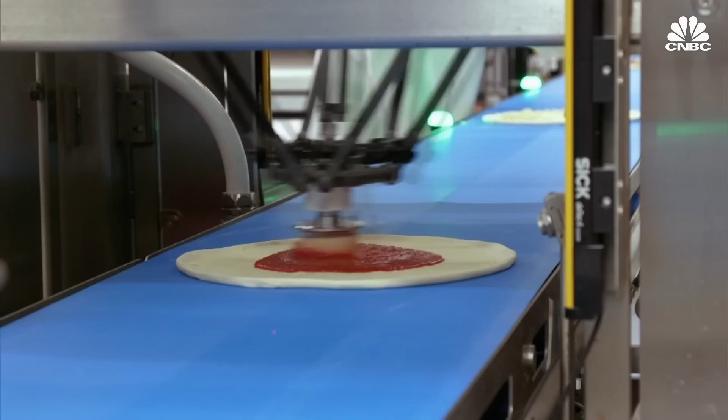What if there was a better way to make and deliver pizza to you? Turns out there is. Fast food jobs are demanding and sometimes even dangerous, but not for robots. The machines can look at more things faster in greater detail. They never get bored. They don't need breaks.

Boston Dynamics has made a name for itself by building robots like Spot. We're using technology to advance the state of the art in molded fiber production, and we can do it with speed that is absolutely category leading.

Welcome to White Castle. This is Brittany. How may I help you?

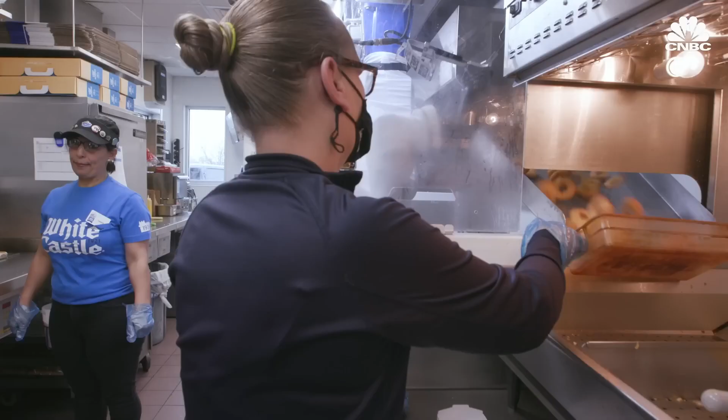This robot named Flippy runs the fry station at a White Castle outside of Chicago. With its mechanical arm and using computer vision technology, Flippy can cook everything from French fries and onion rings to cheese sticks. White Castle said it plans to add 100 Flippies to its kitchens nationwide. We used to need 2 people to operate that French fry area during peak hours, and now we are able to only have 1 person operating that area.

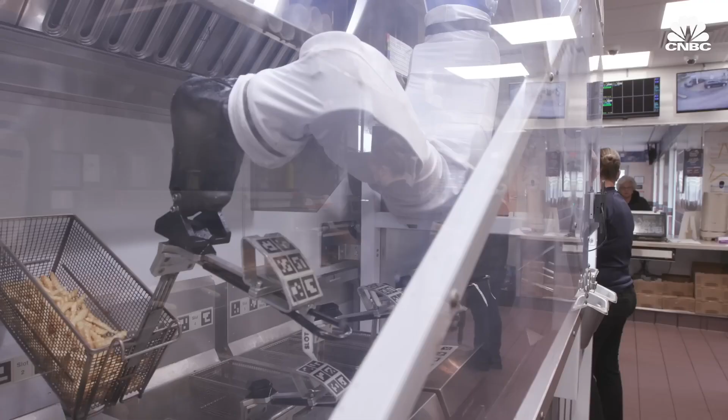Would you like to try the mac and cheese bites today? All right, thank you. If the screen's correct, it is 827.

Second window, please. Fast food jobs are demanding, quick moving, and sometimes even dangerous. But not for robots. When you look at the restaurant industry, it's a little bit late to the party in adopting automation and robotics in particular.

So far, the restaurants that are using them or trying them out say that this automation really only has to do with helping relieve boring tasks from workers' plates, help make their jobs easier, let them engage with the customers more. But there's a lot of reports out there kind of guesstimating how many jobs could be replaced by these robots, by automation. Up to 82% of restaurant positions could to some extent be replaced by robots.

Automation could save U.S. fast food restaurants over $12 billion in annual wages. And restaurants are also struggling to find workers. American restaurants are down more than 560,000 jobs, or about 4.6% of its workforce from their pre-pandemic levels. About a third of Americans worked in a restaurant as their first job, and half have some restaurant work experience.

Yeah, the economics of this are very, very compelling. If you take minimum wage, just around the $20,000 per year mark, that's the cost of 1 robot. Other companies in the space include Picnic, that has a robot that makes pizza, and Autec, whose machines make sushi.

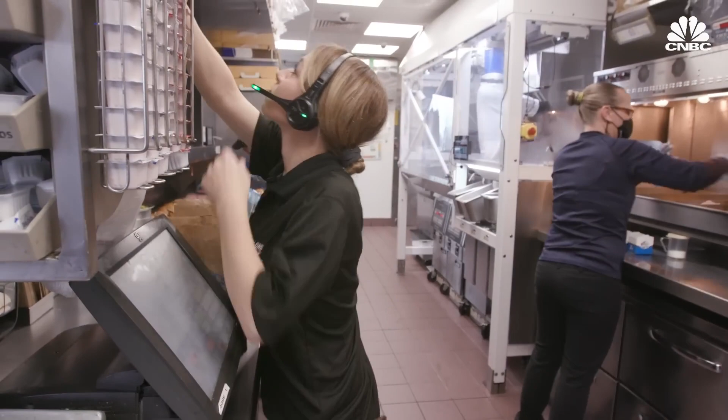So what impact will robots have on the fast food industry and the livelihood of its workers? CNBC got a behind-the-scenes look at restaurant robot maker Miso Robotics to find out.

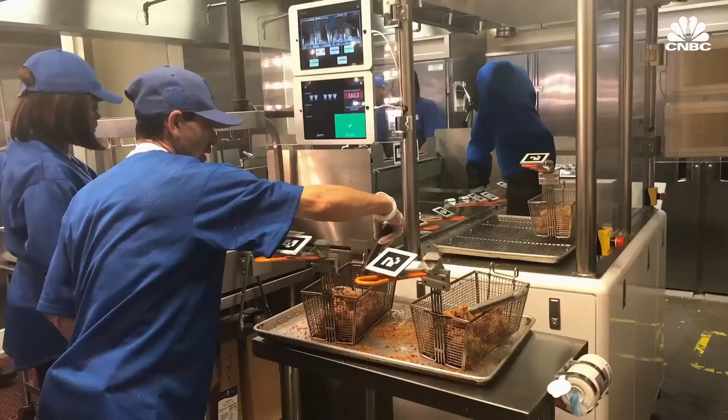Miso Robotics got its start in 2016 with a handful of engineers in a Pasadena, California garage. 2 years later, the company launched Flippy at a nearby Caliburger restaurant. Flippy's first job was turning over a hamburger patty after it was placed on a grill by a human chef. But the company quickly pivoted to fried foods, rolling out a portable fryer station for baseball games at Dodger Stadium.

This was really the peak throughput test for us. Can Flippy keep up with in-between innings at a Dodger game and everybody goes to the concession stand? Can we meet that demand?

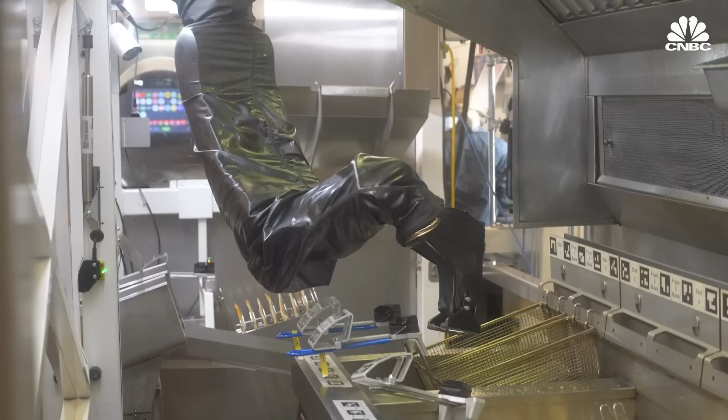In 2021, Miso launched Flippy 2 using a mounted rail system, AI, and computer vision technology that can identify and track food as it moves through the structure. Although it has a camera, tablet, and robotic arm, engineers say the real tech is in the software.

The hard thing to get right about this product is having the computer vision, the algorithms that plan the cook cycle, and the software that manages the robotic motion to all work together so that it's as reliable as a refrigerator and it does the job.

Food is dispensed directly from the freezer into a basket. The robot's computer vision identifies the type of food and places it in the appropriate fryer. Once the food is cooked, the basket is taken out of the fryer, shaken, and dumped into a holding area where it is bagged by a worker.

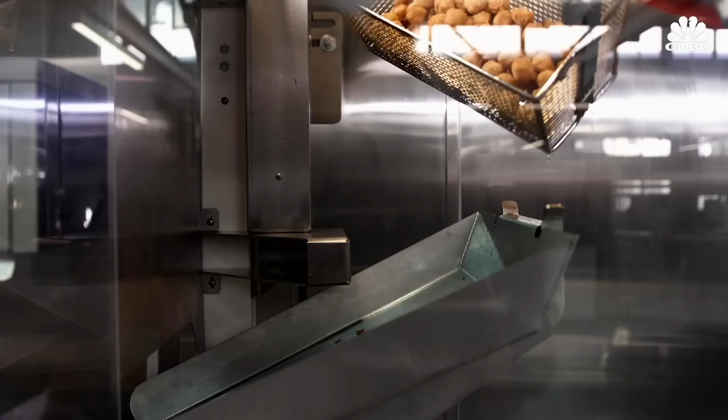For those of us who have been in a restaurant, this is exactly the same process that is done today by a human. He's constantly playing like a multi-frame game of chess in his mind, understanding where to be next, so his sequence of movements is precise and he doesn't undercook or overcook food.

But what about the cost?

Miso charges restaurants about $3,500 a month for a Flippy 2 under its robot-as-a-service model. The company charges an additional fee of about $10,000 for installation.

By comparison, the median hourly wage of fast food workers in the U.S. is just $12.07 an hour. There were roughly 11.7 million restaurant workers in the U.S. in 2022. But Flippy 2 is different.

Flippy 2 works around the clock. We have many 24-hour locations where Flippy 2 is installed. Flippy doesn't call in sick.

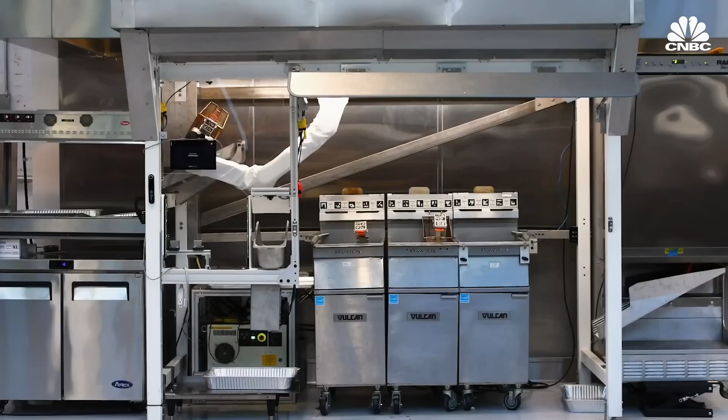Built in Columbus, Ohio, it takes Miso about 6 weeks to manufacture one Flippy 2. The current off-the-rack mechanical arm is the same type designed for car factories, and Miso says they cost $15,000 each, plus another $5,000 to modify with additional grippers and sensors. Last year, Miso partnered with robotic arm maker Ally Robotics and hopes to start producing its own arm in 2023.

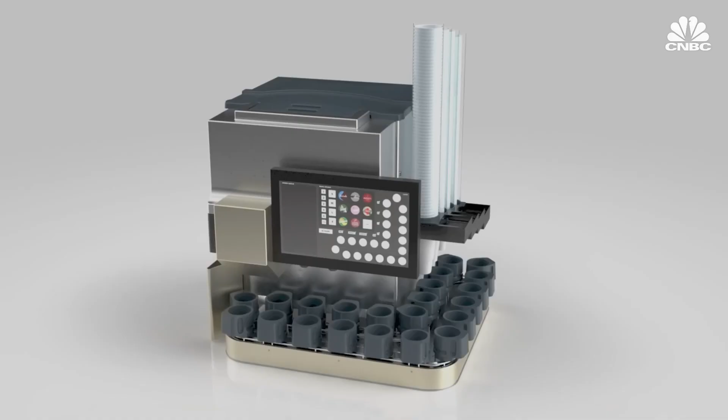The company also makes a streamlined version of Flippy 2 called Flippy Lite, as well as a drinks dispenser named Sippy. Flippy Lite is currently being tested in restaurants by Chipotle. And what Flippy Lite is designed to do is to take one item that requires frying and just cook the heck out of it all day long.

With about 25,000 shareholders, Miso has so far raised more than $70 million in crowdfunding. The company's also announced it is testing a robot that fries chicken wings for WingZone.

The global fast food industry is a $273 billion business, including more than 280,000 fast food restaurants in the U.S. alone. At this White Castle on the outskirts of Chicago, staff in the busy lunch hour shift face a barrage of orders coming from drive-through customers as well as the main counter.

Would you like to try any mac and cheese bites today? Oh, thank you. If the screen's corrected, it's 10:42. Second window, please. It's very fast-paced. We're all in our positions, but we do move around, jump about to help out to get the orders out.

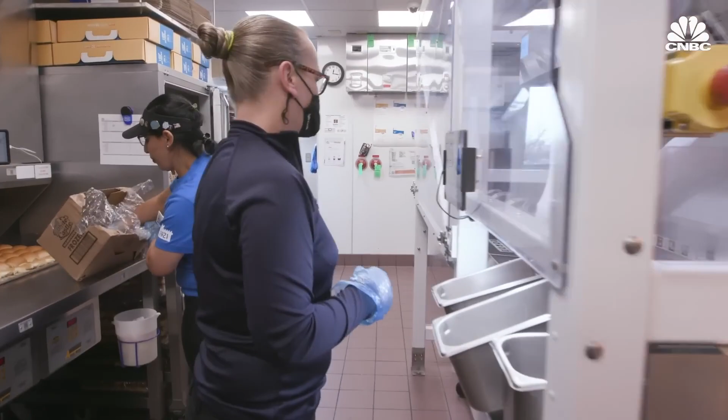But meager salaries, fewer teenagers in the workforce, and fear of COVID have been a drain on fast food restaurants. Job openings at restaurants and hotels reached 1.3 million in November 2022, the 20th consecutive month with over 1 million vacancies. Bars and restaurants make up about 90% of those positions.

A typical fast food worker makes about $26,000 a year, compared with a concierge at a hotel who can earn more than $37,000. During the pandemic, we faced a lot of staffing challenges, and things are better, but there are still challenges with staff in many locations.

To assist workers, White Castle added Flippy to take over its fry station. The robot cooks food more consistently and doesn't require time off.

And I think some restaurants are also looking at this as a way of, well, this robot is expensive, but is it cheaper than however many employees I would need to hire, especially because a lot of workers have not been sticking around as long as they're used to.

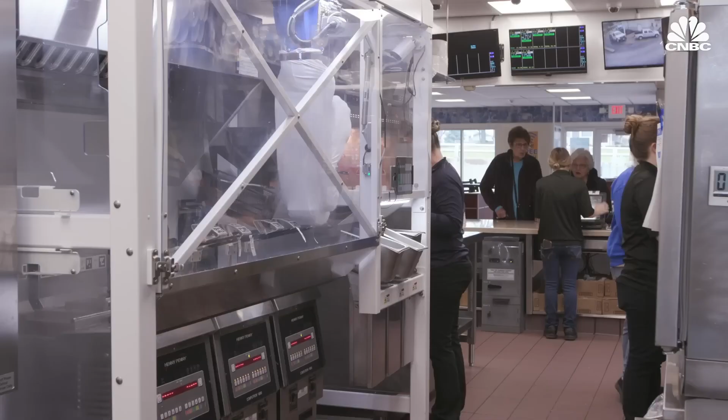This is one of the positions that is the hardest to fill and hardest to retain for restaurant operators. There are dozens of positions back of house. This one is a really demanding one. It's hot and it's very, very fast paced.

Robots like Flippy solve other problems for restaurants too. For starters, fast food work can be dangerous. In California, the state with the highest number of people employed in the fast food industry, workers face health hazards, ranging from overflowing sewage, smoke inhalation, and extreme heat, according to one study.

Turnover is another headache for the industry. Prior to the pandemic, the restaurant industry faced a workforce turnover of 130%, according to Panera Bread's CFO, Michael Bufano. At the same time, low-wage workers made up 43% of the U.S. workforce.

As you look at the labor allocation within the restaurant, that's being able to shift one human from that station somewhere else, and that's saving every single month probably somewhere around $700 to $900 in actual profit.

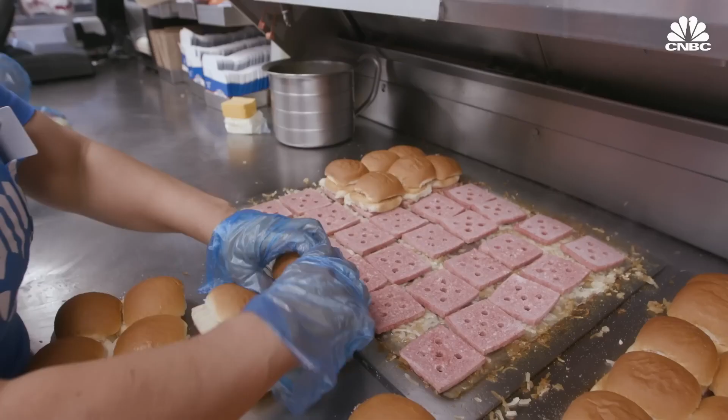Another incentive for restaurants, hard-to-fill positions have forced chains to push hourly wages to new highs. The wages have been very low in these industries. They've really been very much pegged to the minimum wage, so that when the minimum wage has been allowed to decline in real terms, that is, it hasn't kept up with inflation, then those jobs get progressively less and less attractive.

Labor is one of the biggest costs restaurants face, averaging about 25 to 30% of sales. McDonald's said it would reach an average of $15 an hour by 2024 at all company-owned restaurants. Starbucks said it was bringing its pay floor for U.S. baristas to $15 an hour.

Gen Z consumers made 5 billion restaurant visits in the year ending July 2022, including 4.3 billion trips to fast food eateries.

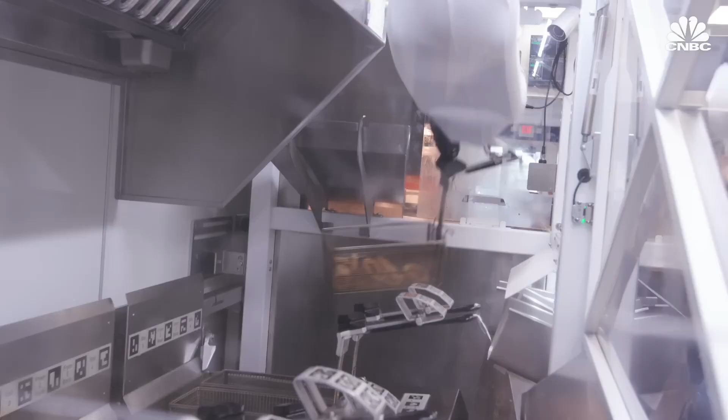Restaurants often have thin margins, which is one of the reasons why adoption of automation has been slow. But that could be changing as the cost of robots has declined by 50% over the last three decades.

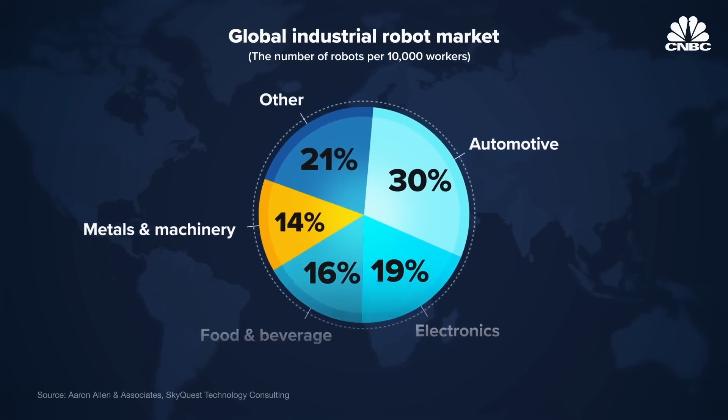Industrial robot usage has tripled over the past decade, from about 1 million in 2010 to 3 million in 2020. The auto industry, by far the largest segment in the market, is followed by electronics, food and beverage, metals, and machinery. The industrial robotics market is expected to reach $81 billion by 2028, up from almost $42 billion in 2021.

But will those trends impact Miso's business? Robots are hard and expensive to develop. It takes a lot of time and money, and frankly a lot of engineers, to get all the technology working together smoothly. Miso makes money by having more and more robots in the field.

In 2021, Miso spent $1.5 million on R&D, $7.8 million on salaries, $6 million on sales and marketing, and a little over $6 million on overhead and administrative expenses. Revenue was just $36,000 in 2021, mostly from the deployment of one Flippy.

Right now, it seems like Miso Robotics is probably the biggest and best known player in the space. Competitors are a pretty small pool at the moment. We've been on the forefront of this for a long time, but they are coming, and we know the ones that aren't here today will be here tomorrow.

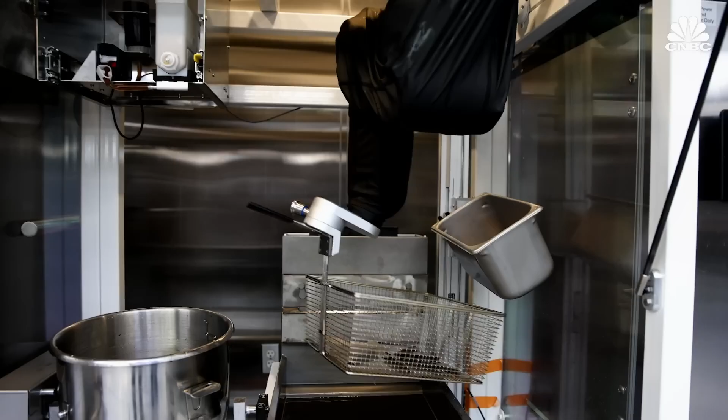Robot adoption could come quickly, in a similar fashion to the way delivery apps revolutionized the restaurant space. The global food delivery app business is over $150 billion, triple the amount it was in 2017.

And that would be welcome news for fast food restaurants who face pressures ranging from rising food costs to staff turnover. Americans spent $2.1 trillion on food in 2021, with more than half of that money going to food away from home purchases. The tide has turned.

There's no longer a question of whether robotics are coming to the industry. It's a foregone conclusion. The question is, at what pace and in what form? And what you will see in the months and years ahead, for the foreseeable future, is more and more automation solutions like Flippy 2 being deployed in everyday restaurants, including some of the best known brands in the world.

There was a lot of hype in 2017 around Zume. What if there was a better way to make and deliver pizza to you? Turns out there is. Zume is revolutionizing the delivery model. All pizzerias out there, you're in trouble.

At the time, Zume was a pizza company that used robots to automate the pizza creation process and utilized large oven-carrying trucks to bake the pies as they traveled to customers. The idea was a hit and earned Zume a $375 million investment from SoftBank.

So why are we talking about pizza made by robots in a video about compostable packaging? That was our question too.

One of the problems we encountered in pizza was that our beautiful pizza, with no stabilizers in it, in a traditional box, declined in quality from the time you cooked it to the time it was delivered, to the point where we didn't think it was good enough. So we designed a new pizza box.

At the beginning of 2020, Zume laid off half of its workforce, 360 employees. This is another stumble for SoftBank's Vision Fund, which invested $375 million into Zume, bestowing that unicorn status, a $1 billion valuation. But the company kept going.

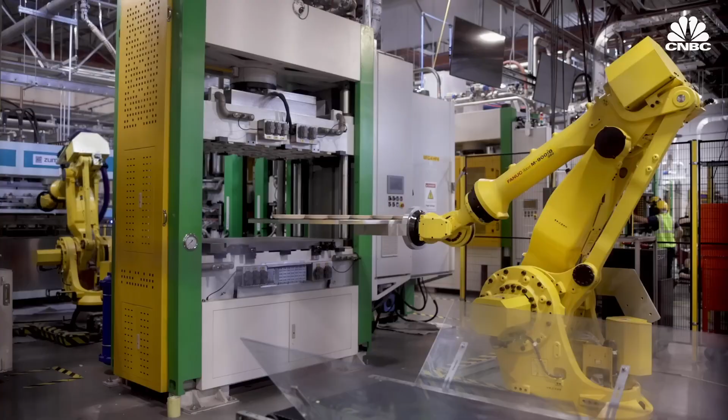Now, Zume is dedicated to producing compostable packaging that is durable and backyard compostable, breaking down in a matter of 90 days. Zume is breaking into the...

$274.2 billion sustainable packaging market, which is expected to grow to $413.8 billion by 2027. But the industry does face challenges. I wish I could say it was just the cost, and cost is going to come down, or that we need one thing, but it's really, I think, a variety of factors. As the oceans fill up with plastic waste and as companies make pledges to switch to greener packaging, it could be great timing for Zume.

So let's take a look at some roadblocks in the compostable packaging industry and what can be done to overcome them.

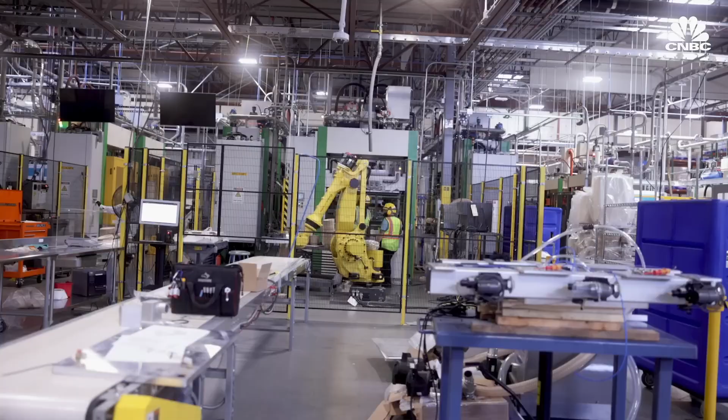Let's talk about the life cycle of a package first, using a takeout container as an example. Takeout containers can be made of many different materials, which all have their pros and cons, like plastic, metal, styrofoam, cardboard, and a compostable material like molded fiber.

Some plastics and metals can be recycled, but they have to be perfectly clean in order to be made into another product. They can also be downcycled, which is where they're used to create something that cannot be recycled again, like a park bench. But recycling has failed in the US.

In 2018, less than 9% of plastic waste was properly recycled in the US, and it got worse in 2019 when China stopped importing American trash. So most of what you think may be getting recycled is actually getting sent to landfills, or making its way into rivers and oceans. The UN says that by 2050, we'll have more plastic than fish in the ocean.

Plastics have become so prevalent that every person on the planet eats a credit card's worth of plastic a week. Plastic recycling has actually been considered by some to be a ploy by oil companies to make plastic production seem more environmentally friendly than it is.

And even sending food scraps to the dump can be harmful. When you're actually introducing those organics in landfill, you create a lot of methane. And as you know, methane is a very important greenhouse gas emission. So then you want to reduce that amount of organics that you send to the landfill.

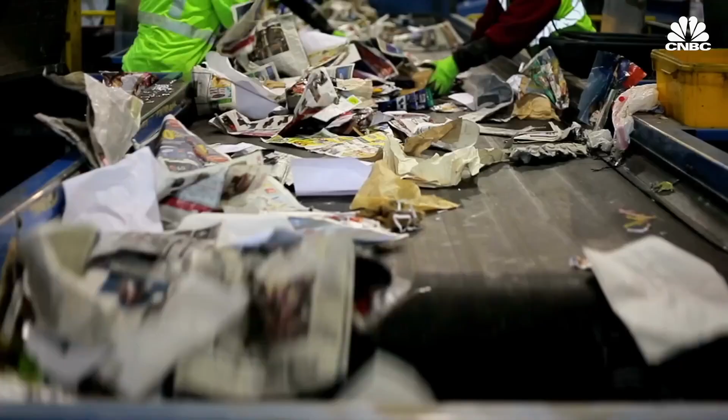Aluminum containers are a bit easier to recycle, but still only saw about a 35% recycle rate in 2018. Cardboard is recyclable and compostable, but only if it's clean and doesn't have some sort of coating on it. Virgin cardboard can also contribute to the deforestation of endangered habitats. Styrofoam, or polystyrene, is technically recyclable, but not in a way that is economically feasible or environmentally effective.

Many cities and states, including New York City, Maine, Vermont, Maryland, and a long list of cities in California, have completely banned the use of polystyrene, and the trend is growing.

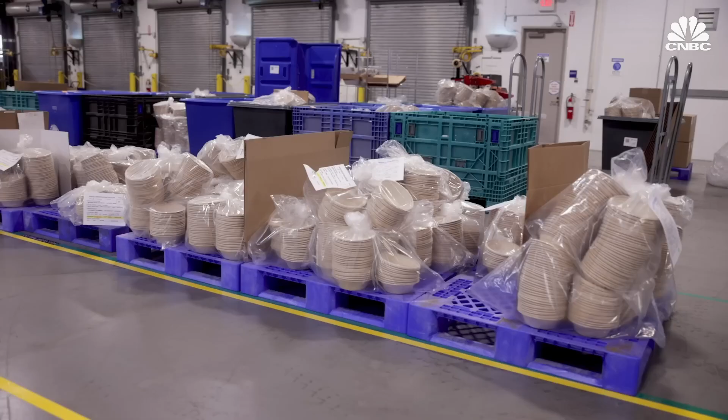Compostable materials seem like a solution to these recycling issues, but come with their own set of confusing marketing tactics and end-of-life difficulties. For instance, the word biodegradable, which is used to describe certain materials like plastic made from corn, has been scrutinized. A bio acronym at the beginning doesn't necessarily mean that the polymer is from bio-based resources or is biodegradable.

And if it's biodegradable, it doesn't mean that it's compostable either. The word biodegradable on its own, as a marketing term, is seen as potentially pretty misleading. So several states have passed laws actually forbidding the term biodegradable in marketing language when it comes to single-use items, states like California, Maryland, and Washington, and Minnesota for bags specifically.

Some materials require composting in an industrial facility, like certain cutlery and coffee cup lids, which means you can't just throw it in your backyard and hope it will break down. It has to be sent to a facility that monitors the chemical and temperature levels of a large compost pile. The materials are also sifted to make sure everything has broken down properly.

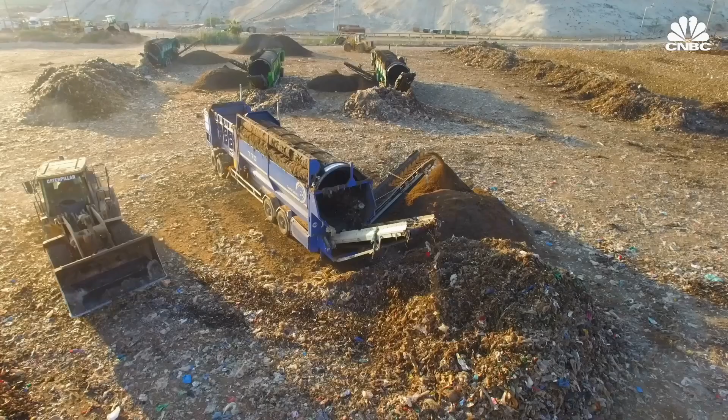And if you think you're doing the environment a favor buying these industrial facility compostable products and still throwing them away in the trash, you're only partly correct. Landfills are usually too compressed to allow oxygen and microorganisms to break materials down, even for things like food or paper, which are usually pretty easy to break down.

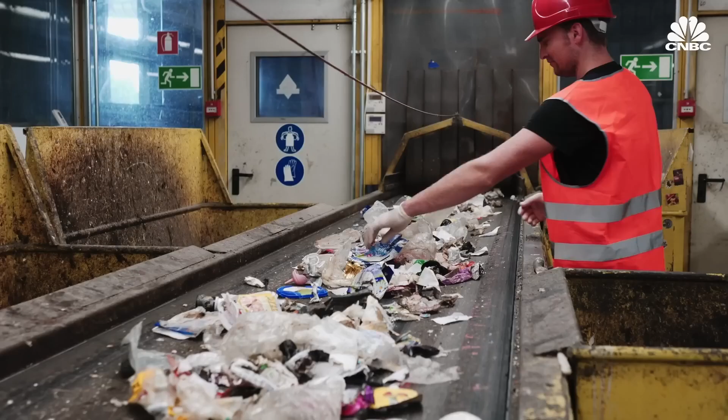Unlike with recycling, where you have different plastic types, different shapes, which can help determine recyclability, and each community has its different requirements based on what their recycling facility can sort, there's no one common definition of what is recyclable. With compostability, it's different. We have international standards saying this is what is compostable, regardless of what plastic type you're using, regardless of whether there's paper in there or not.

According to one report, only about 27% of the United States population has access to some kind of composting program that accepts either food waste only or food waste and some form of compostable packaging. So it's not a ubiquitous solution yet.

Backyard compostable packaging can break down without the use of industrial monitoring. They use the microorganisms in the soil or water to break down packaging. For people living in areas without composting services, this gives consumers the option to discard their waste in a local compost pile or even in their own backyard. We've tested our products with independent labs in all of the known waste streams, and we have all the certifications that give you the results you'd be looking for.

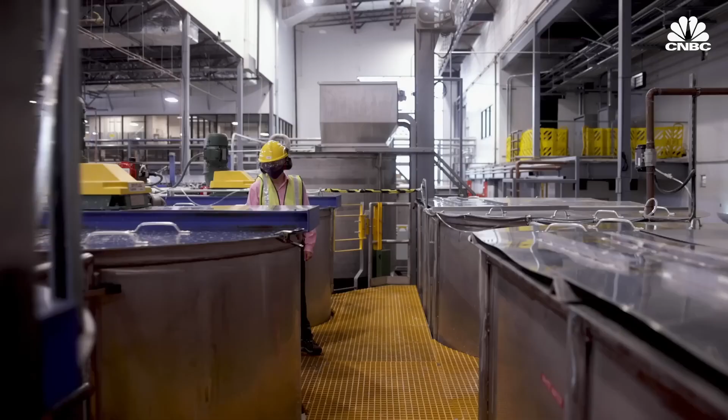Let's build a pulp mill next to the source of the agricultural waste, so it doesn't get burned or taken to a landfill. Turn it into premium molded fiber packaging that is then composted, so it's a place to grow the next crop. It's a closed loop supply chain, and that's something we've heard a lot about over the past year.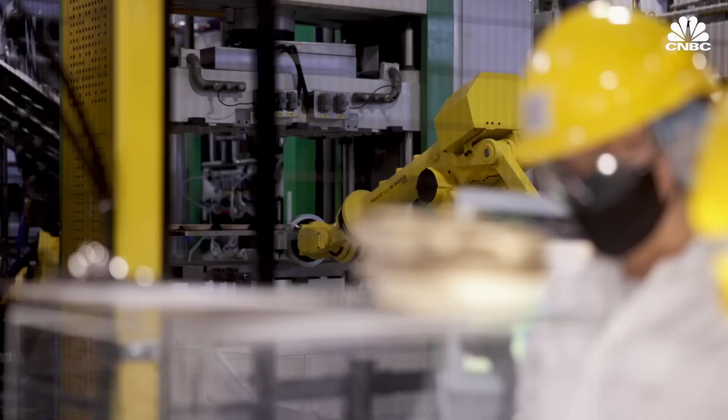The company has products available in 21 countries, including takeout containers, cosmetics packaging, and their robotic technology for when a company wants to produce packaging themselves.

We work with some of the largest industrial companies in the world, and they build factories based on our technology. At the same time, we work with some of the biggest brands in the world, and we solve their product problems. We help give them a road beyond plastic. When we have these fully qualified products and these fully qualified factories, we connect the two together, giving brands a path beyond plastic at scale, with great economics for the brands and for the factory partners.

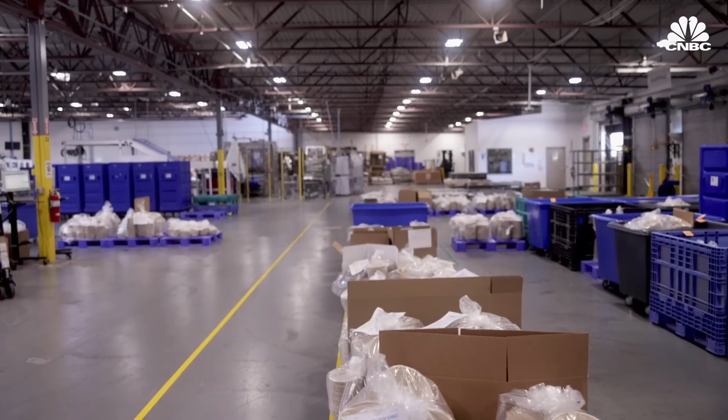The sustainable packaging industry is a $274.2 billion a year business. Of course, the packaging industry as a whole is about $900 billion, so there's still a lot of work to be done.

There are some constraints when it comes to compostable packaging, like higher cost. 100 plastic straws can cost as low as $1.53 when bought in bulk, compared to paper straws, which can cost $1.67 for 100, an increase of 9%. These plastic clamshell containers for burgers and sandwiches can cost 13 cents each when purchased in bulk, while their natural fiber counterpart can cost 19 cents each, an increase of 46%.

Remember, packaging is a commodity and it's always a low-cost product. So in general, for food or this kind of situation, your margin is very small, meaning you don't have a large amount of room for cost in the packaging system. Zume says its robots are the reason it can keep costs down. Previously, machines could either make very low quality things quickly.

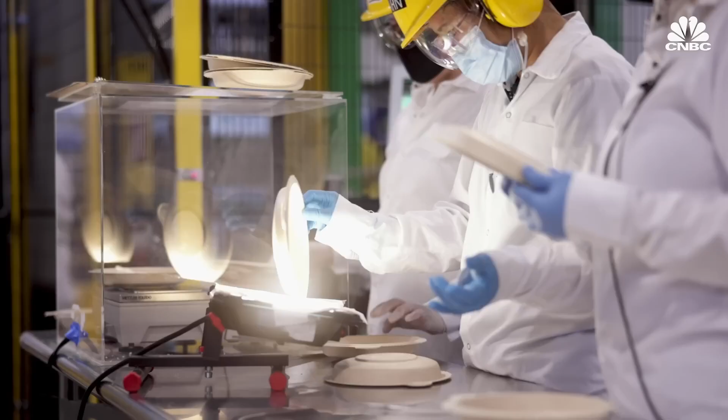Some machines could make high quality things very slowly, but they were so expensive that they would be outrageous for a consumer market. What our technology does that's so revolutionary is it can make very high quality parts very fast.

And then there's the question of performance. Compostable packaging companies have come up with many ways to make their products as durable as environmentally damaging alternatives, but it's not always easy. We're using technology to advance the state of the art in molded fiber production, so we can take many, many millions of tons of agricultural waste and turn it into not plastic. And we can do that without compromising on performance or on price.

One thing Zume doesn't have control over, though, is the difficulty that comes with waste management, including the lack of composting programs mentioned before, along with the general confusion of whether something is compostable or not.

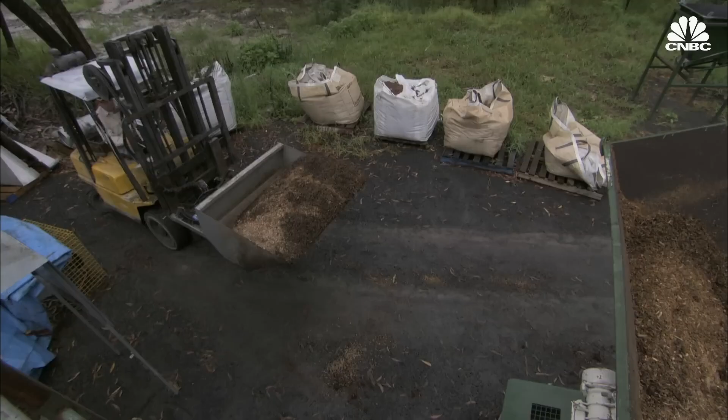The problem is that the waste management system is still at the state level. So we have 50 states with different types of goals. So we should have tried to get at least an aggregation of states, or if the federal government can actually pass some type of legislation where we have goals to move the whole country forward.

Without a fully circular economy, meaning packaging is created, used, and turned back into materials that can be used to create more, our packaging obsession will continue to cause problems. There's tremendous demand for these solutions in the market and with consumers. So now that the solutions exist and the demand is there, now we're getting the scale.

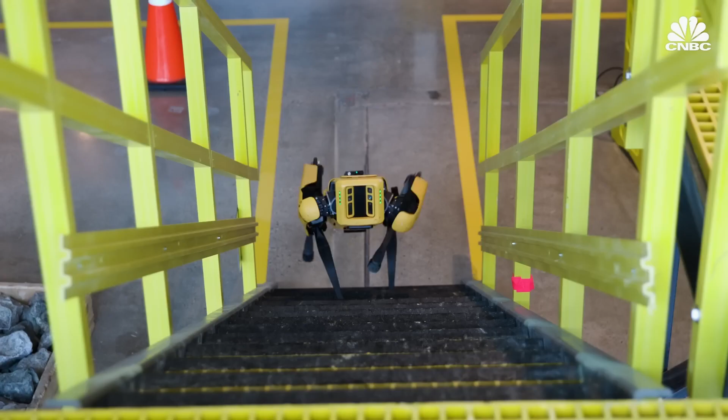You may have been one of the 140 million people who've seen this video on YouTube. Boston Dynamics has made a name for itself by building robots like Spot, which move in ways that many of us have only seen in sci-fi movies.

We look at ourselves as having mastered the ability to create robots with mobility, vision, and manipulation. And we think we can combine those in almost an infinite number of ways for different applications.

The public's fascination with Boston Dynamics' robots is likely owed to equal parts awe and fear. A 2017 episode of the popular dystopian Netflix show Black Mirror depicted a woman running from a pack of killer robot dogs. The show's creator later admitted in an interview with Entertainment Weekly that Boston Dynamics' videos were the inspiration.

Most people think when they see Spot that that's cool. There is a small fraction of people who say it's creepy. We've been telling ourselves fictional stories about dystopian robots for 100 years. I think it's people's desire to explore that fear that makes them want to react so negatively to Spot.

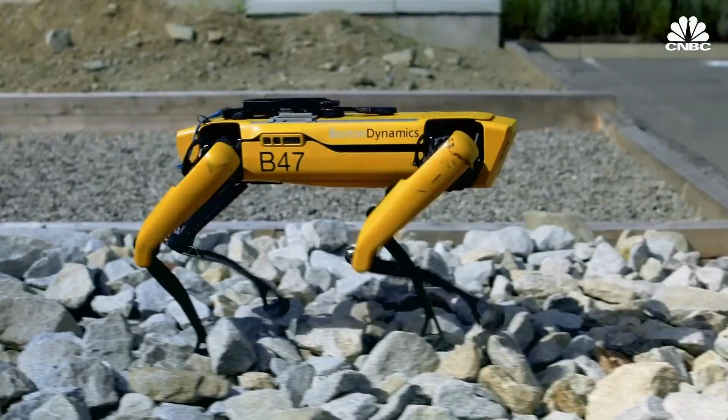But while Boston Dynamics has sparked the imaginations of the general public with its viral videos, the company is now hoping to get the attention of paying customers.

I expect that we will become a serial producer of novel robots with advanced capabilities. I think we'll build every 3 to 5 years. We're going to roll out a new robot targeting a new industry.

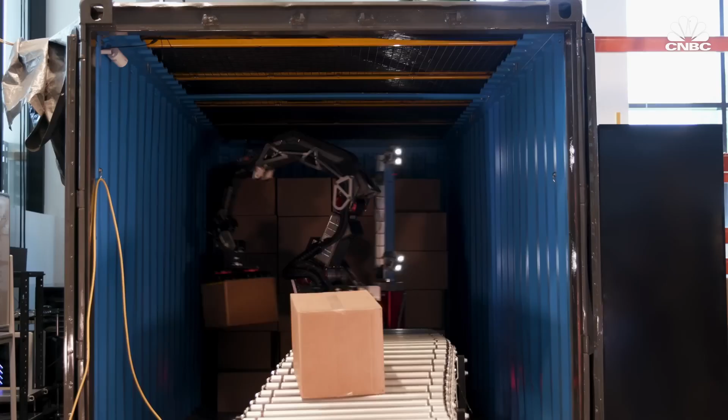CNBC got a rare look at Boston Dynamics' office in Massachusetts, where the team showed off 2 of the robots they're working to commercialize, Spot and Stretch. The yellow robot that you see walking around is a mobility platform. It gets really interesting when you start adding payloads on it and integrating it into things.

We have really nice visual cameras, thermal cameras, microphones, gas sensors, and those let you take the robot into interesting places and collect data about what's going on.

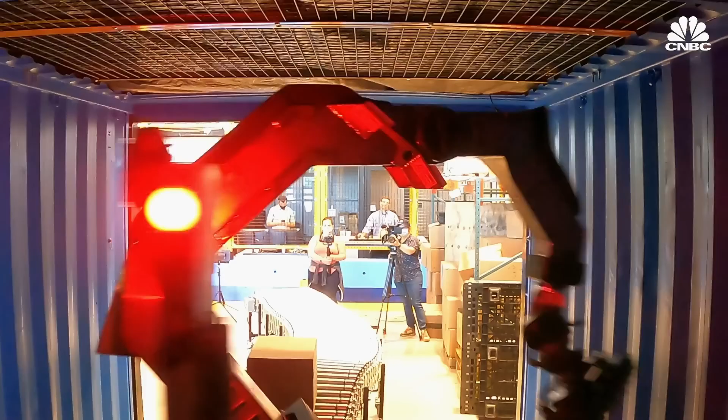We see Stretch as ultimately a general purpose box moving machine that can be used anywhere in the warehouse. Those 2 markets in particular, the robotics inspection and the warehouse market, are what we perceive to be the fastest growing market within all the robotic subsegments.

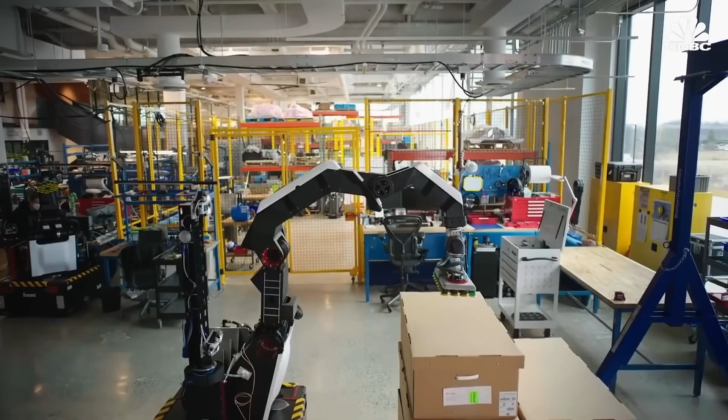The machines can look at more things faster in greater detail. They never get bored. They don't need breaks. They're just relentless. With nearly 30 years of experience, Boston Dynamics has proven its ability to make robots that move in remarkable ways. Now the question is, can the company turn a profit?

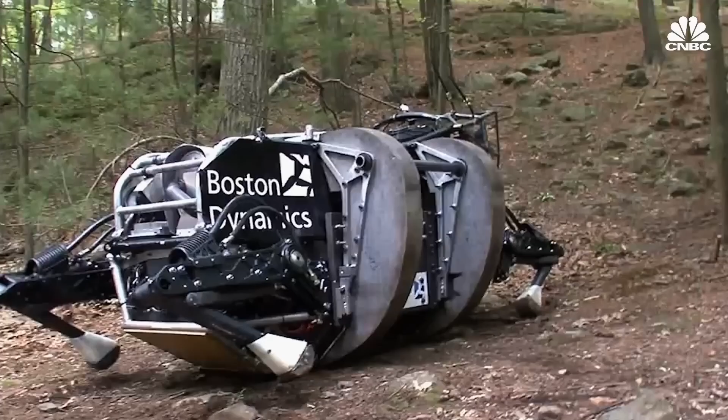Boston Dynamics was founded in 1992 by Marc Raibert. The company was an offshoot of Raibert's work on dynamic robots at Carnegie Mellon and MIT. Early on, much of Boston Dynamics' research and development was funded by the US military and DARPA. In addition to robots, Boston Dynamics also developed 3D computer simulation software.

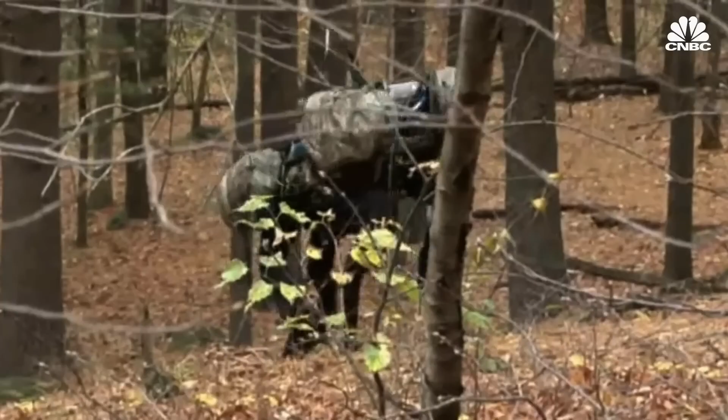This robot, LS3, was part of a project that we worked on with DARPA and the Marines. This was a proof of concept project to show that the robot could actually carry equipment in a useful way for a Marine squad. Some of Boston Dynamics' other early creations included Big Dog, which, like LS3, was meant to

traverse rough terrain and help soldiers carry gear, and Cheetah, which, at its fastest, could reach speeds of 28.3 miles per hour. Petman was one of the company's first humanoid robots. It was developed for the US Army to test the special clothing used by soldiers for protection against chemical warfare

agents. We're very proud of our history that involved DARPA and government funding for creating some of the fundamental technology. It was really that visionary funding that sustained over long periods of time that was required to solve truly hard problems. But in 2013, the company's focus shifted after Boston Dynamics was purchased by a well-known technology behemoth.

What does Big Dog, Wildcat, and Cheetah have in common? While it may sound like the beginning of a joke, those are the names of robots by Boston Dynamics. Google continues its recent string of acquisitions with an engineering company whose repertoire includes designing research robots for the Pentagon.

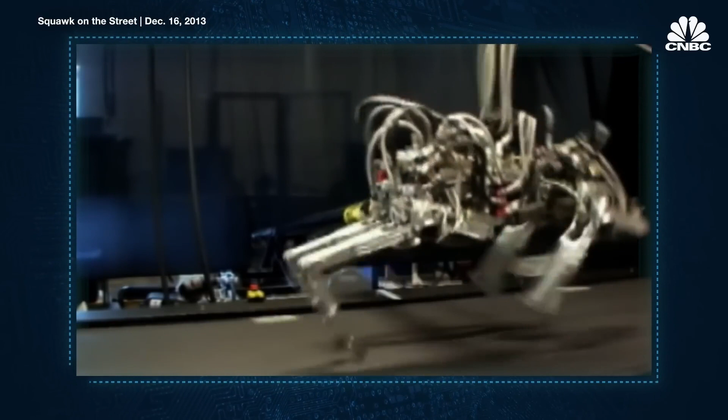When Google purchased Boston Dynamics for an undisclosed amount, the internet giant was gobbling up robotics companies left and right. The New York Times first reported the acquisition, noting that it is the 8th robotics company Google has bought in just the last 6 months.

There is speculation that Google wants to build a new class of robots that could perhaps do everything from warehouse work to package delivery. At that time, Google was a bit more ambitious, and they were trying to look for the sort of next big thing.

And highly specialized robotics is sort of perceived as a big emerging area that the industry was expecting or anticipating at that time. Google itself did not say much about the acquisition, other than that it would honor Boston Dynamics' existing military contracts, but was not interested in becoming a military contractor itself.

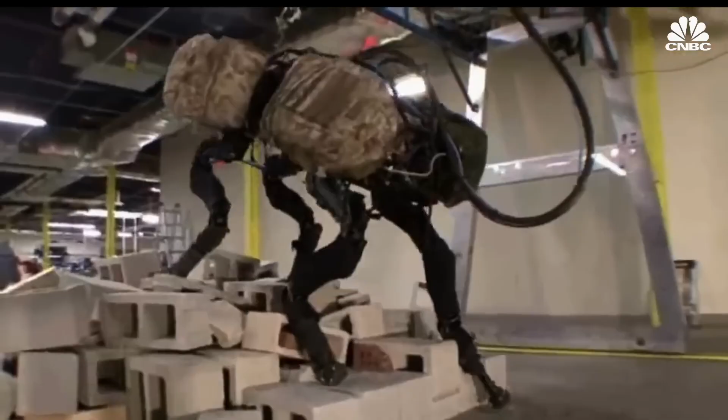I think there are some concerns around Google dabbling with military contracts. They might hurt their public reputation. But without government contracts, Boston Dynamics would lose its revenue stream. Even existing contracts that the company had with the military did not always pan out. And R&D was expensive. Owning Boston Dynamics reportedly cost Google $50 million a year.

Internal movement at the company also shook things up. When Google bought Boston Dynamics, its robotics effort was being run by Andy Rubin, who was well known at the company for leading the development of Android. But after Rubin left Google in 2014, Google's robotics division stalled.

Then in 2015, Google, which by then was renamed to Alphabet, got a new CFO, Ruth Porat. Over the next few years, Porat went on a cost-cutting spree, and Boston Dynamics was one of the casualties. That relationship didn't really last very long, mainly because the fruit of that relationship is not as big as what Google perceived it to be.

Boston Dynamics again found itself with a new owner. SoftBank adding to its artificial intelligence portfolio by buying robot makers Boston Dynamics and Tokyo-based Shaft. Once that company moved on to SoftBank, it tried to inject more of a commercial DNA into the startup itself.

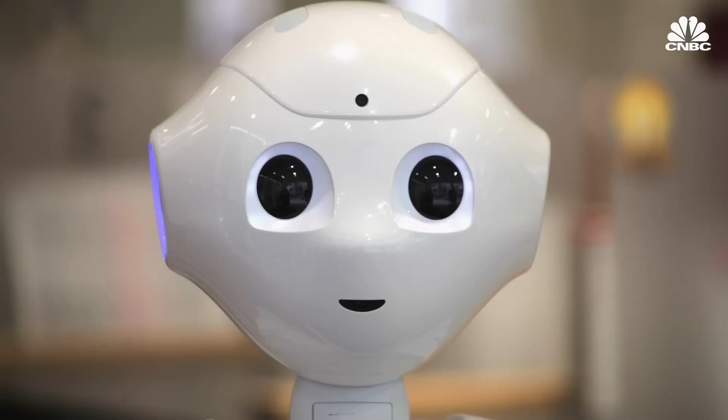When SoftBank purchased Boston Dynamics in 2017 for a reported $165 million, the Japanese conglomerate already had a few robotics companies in its portfolio, as well as a consumer robot known as Pepper. The idea for SoftBank was that it really wanted to become a large robotic supplier to the industry in general.

Under SoftBank, Boston Dynamics did open up sales to its first commercial product, Spot, in June of 2020. Prior to that, the inspection robot had only been available to lease as part of the company's early adopter program.

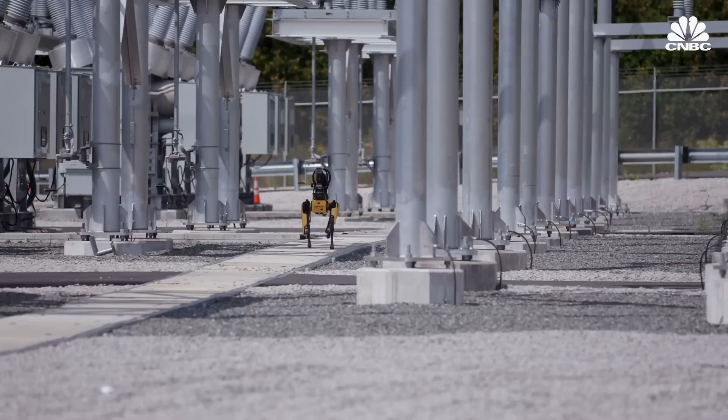But like Google before it, SoftBank found that breaking into the robotics market was harder than it seemed. The market still largely concentrated around industrial robots as well as warehouse robots. So the robot types or form factors that Boston Dynamics excels in are not what the market wanted at the end of the day.

In December of 2020, Boston Dynamics changed hands again. South Korean car company Hyundai announced that it was taking an 80% stake in Boston Dynamics to the tune of $880 million.

This year, tens of thousands of robots will be built and put to work out in the world making money. But in the next 10 years, millions of robots will be built and put to work in the world. In most of these markets, no matter how big they are, a small number of companies end up dominating a majority of the market share. So I think Hyundai is positioning itself to be the leading robot manufacturer.

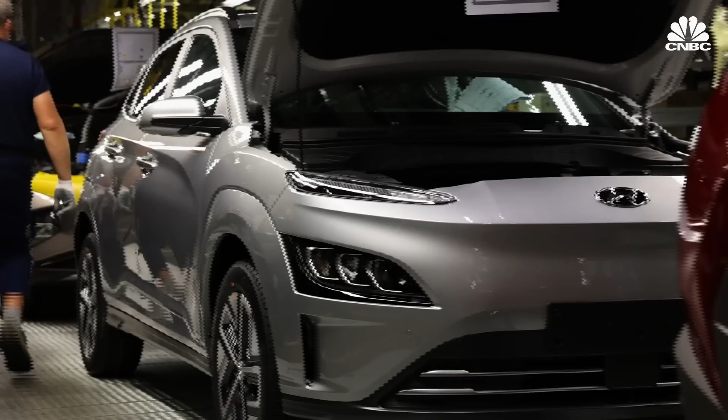Hyundai bought us for our mission. They're excited about our mission to launch novel robots that can help industry. Ultimately, I think they see their own mission evolving beyond cars to generalized mobility, and see the things we've been developing as ultimately complementing them.

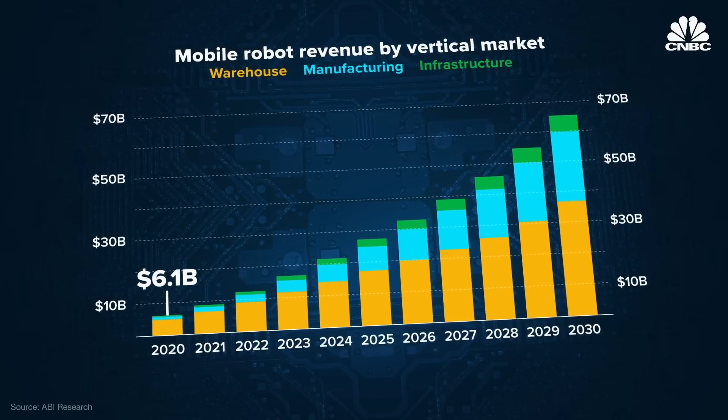Hyundai and Boston Dynamics are still far from dominating the robotics market, but it's a market with a lot of potential. Revenue from mobile robots in the warehouse, manufacturing, and infrastructure spaces is expected to increase dramatically, from about $6.1 billion in 2020 to about $64.9 billion by 2030.

Something like 800 million containers are shipped around the world each year. Many of those are full of boxes. There's probably trillions of boxes that are loaded and unloaded by hand each year in the United States. It's a huge job, a mountain of material that has to get moved. Stretch is really power tools to help people move that material.

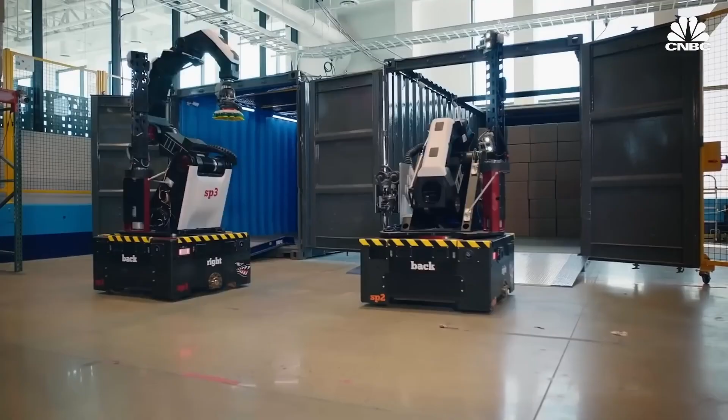Stretch is made up of a few different parts. The robot uses a mobile base to move around tight spaces and go up loading ramps. An arm, gripper, vision cameras, and sensors allow the robot to identify and handle a variety of different objects.

We're starting with truck unloading, but we think truck loading, as well as what we call order building, will be important too. When you go through a warehouse and assemble a bunch of different boxes onto a pallet, that order building is a big job, and we're actually developing that at present.

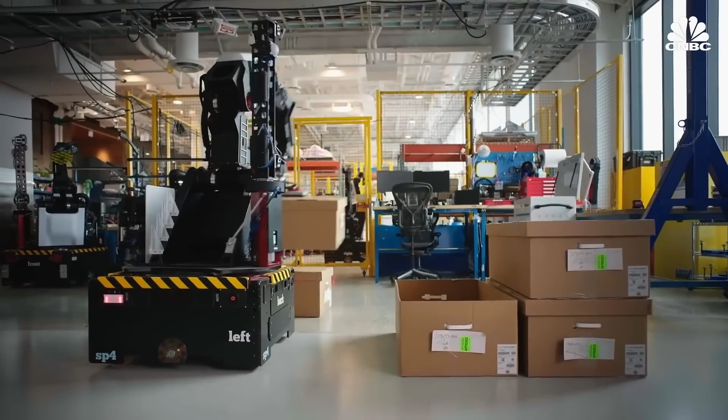Similarly with Stretch, we're building in intelligence so that the robot can deal with unexpected conditions. If it suddenly knocks down a cascade of boxes, the robot can deal with that, pick them up, and clean up its own mess.

How do you feel about competitors? There's Amazon, which has their own robotics for warehouses. There's a lot of automation companies entering the logistics space, and of course the logistics space has a huge variety of problems to solve. We're uniquely focused on mobile box moving, which almost nobody else is looking at, so we think we have a nice, safe entry into that market that we can own for a significant portion of time.

Amazon, I think, is lighting terror in the hearts of all the warehouse owners across the world. So they have a very motivated buyer that wants to buy tech that's comparable to what Amazon is developing.

Boston Dynamics says it expects Stretch to go on sale next year, though it would not provide a price point. Customers can also opt to purchase just the computer vision software that powers Stretch, which Boston Dynamics calls Pick. The company says it's working with a few early adopters to test the robot, but would not say who those partners are.

Unlike Stretch, Spot has already hit the market. We've sold several hundred Spots thus far. We launched it really commercially just last year.

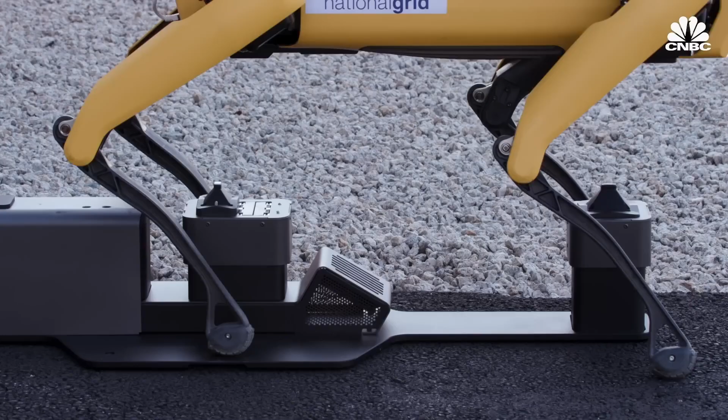The entry-level Spot Explorer is about $75,000. We have another version with additional capability and a recharging station that's a little bit more than that. Sales have exceeded expectations, really. Payloads like pan-tilt cameras and LiDAR are sold separately and can be quite pricey.

Even so, Spot has received interest from a number of industries. So far, the robot has been used to do inspections at construction sites, oil rigs, nuclear plants, to check the vital signs of COVID-19 patients in hospitals, and even remind people to maintain social distance amid the pandemic.

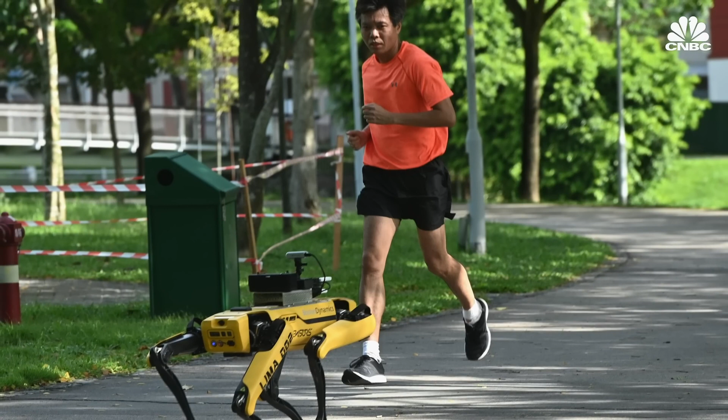So I would take a substation like this and subdivide it into maybe 4 sections, and I would have the robot do a detailed inspection on each of those 4 sections.

This is Dean Berlin. He is the lead technology analyst for National Grid, an electric and gas utility company that serves customers in Massachusetts, New York, and Rhode Island. For the past year and a half, Berlin and his team have been testing 2 Spot robots by programming them to do inspections of National Grid's equipment. Berlin says the team also considered other robots for the job, but chose Spot for its mobility capabilities.

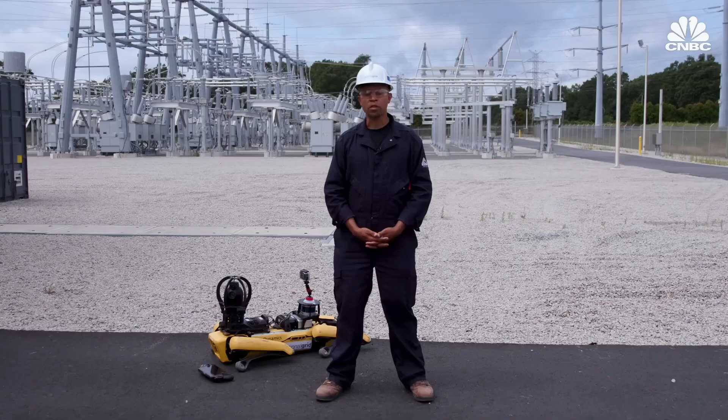Some of the advantages we find for the Boston Dynamics robot is that because it's a 4-legged walking terrestrial robot, it can actually traverse our substations fairly easily. The robot also can be equipped with a variety of different payloads, making it mission specific.

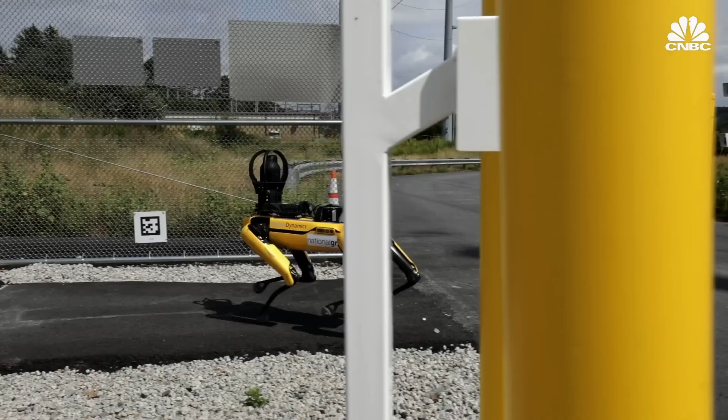So we're going to power on and undock the Enterprise robot. A typical inspection looks something like this. First, engineers program Spot so that the robot knows where to go and what gauges to pay attention to. The instructions for each mission are relayed to the robot using a QR code. The robot that National Grid is using is equipped with LiDAR to help it navigate, as well as visual and thermal cameras to take detailed photos and thermal images of the equipment in the substation.

The robot will be focusing on switches and circuit breakers. It will also take zoomed-in visual images of some of the gauges on the equipment to monitor the levels of those gauges. It can use this information to diagnose if there are hot spots on our assets that might indicate areas of concern or areas that we might need to attend to in upcoming maintenance.

Prior to using Spot, most inspections at National Grid's substations were done by people. In some cases, operation of the substation would have been temporarily shut down, since it wouldn't have been safe for humans to do the inspections while the equipment was still on.

National Grid has noticed savings in terms of time because the robot is able to perform these missions in parallel to a human performing other tasks. So in a sense, you get efficiency from having a human and the robot operating at the same time.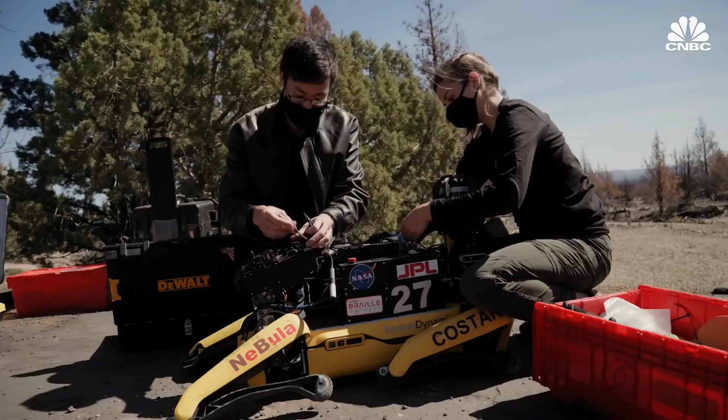Spot may even go to space. NASA has been sending teams of the robotic dogs into caves to see if they can one day be used to search for life on other planets. Caves' protection from cosmic rays and stable temperatures, NASA says, makes them the most likely of places to find life.

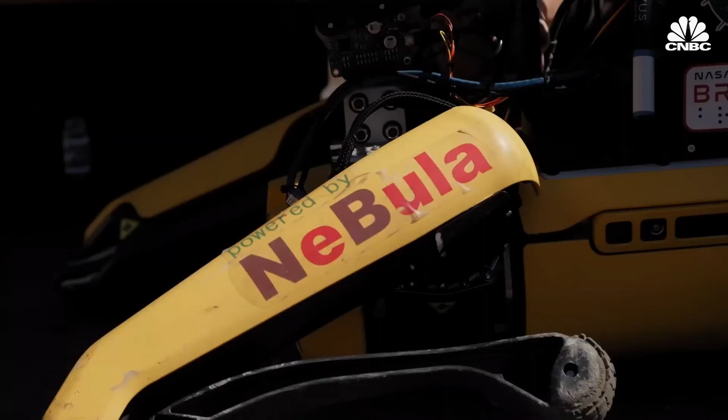My team's focus at NASA is on developing next-generation AI and autonomy algorithms for robotic systems. Our solution, which we call Nebula, analyzes the terrain, analyzes the environment, and risk. In a certain sense, you can look at Nebula as a robot brain that we integrate with a robot body that could be a wheeled rover, a legged platform, or even a flying drone.

In the case of exploring caves, Agha says his team chose Spot for several reasons. You often come across narrow constrictions, narrow passages that you really want to be able to traverse with a system that is not large and bulky. And the Boston Dynamics robot offers an interesting combination of small size, at the same time high locomotion capabilities and enough power to be able to traverse through those sorts of narrow passages.

The ability for Spot to be equipped with different payloads also comes in handy. Sending in one large robot to carry all the scientific equipment needed for a mission would make navigation in the cave difficult. Instead, NASA sends in teams of Spot robots, which can each simultaneously accomplish different tasks.

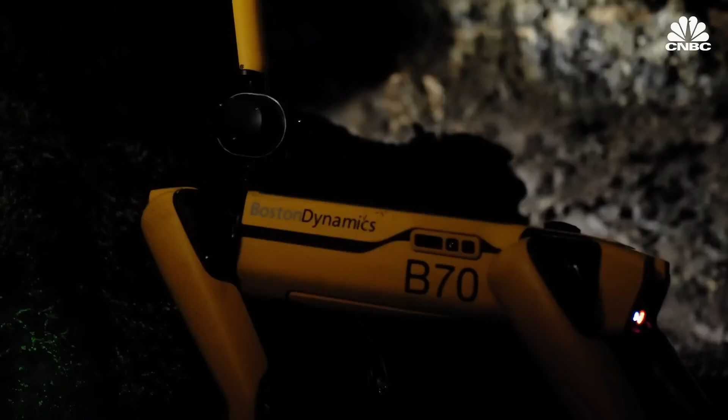NASA says there are a number of things that need to be worked out before Spot can explore new planets, but the potential opportunities have scientists excited. We have a region on Mars called the Tharsis region. There are a lot of interesting caves that if we can explore one day, we will learn a tremendous amount of knowledge and we can get a lot of science from it, but it's highly uneven. That's where different and new locomotion ideas need to come in, and legged platforms is one of those that can transform how we think about exploring.

Although demand for warehouse and inspection robots is expected to increase in the future, Boston Dynamics still faces a number of challenges on its road to commercialization, many of which the company has already been running into with its Spot robot. Over the past 10 years or so, we've basically solved most of those fundamental research problems. And when things were working well enough, we started to ask, how can we make this practical and how can we start making this useful in real applications?

Manufacturing, having a service department, having a sales team, those have all been new skills for us. Marketing, all new things for us that have encouraged us to really expand our staff. Playter says his team has grown from 100 employees during the R&D stage to 400 employees now.

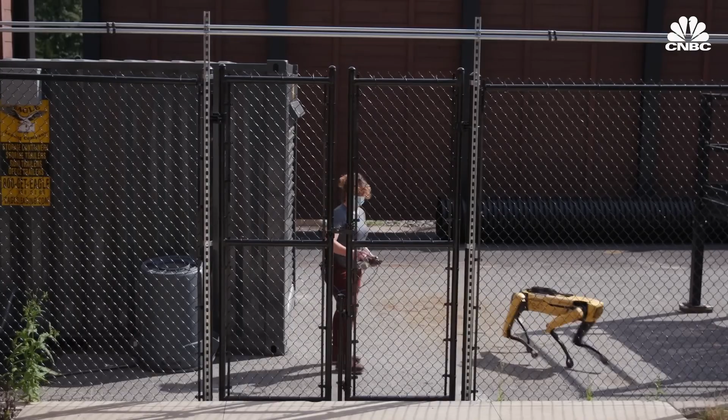So far, Boston Dynamics says it's been able to keep up with demand, producing around 40 to 50 Spot robots a month with the help of contract manufacturers. Final testing, assembly, and repairs are done in-house. But in order to compete in the larger market and have a shot at profitability, experts say Boston Dynamics needs to seriously ramp up production.

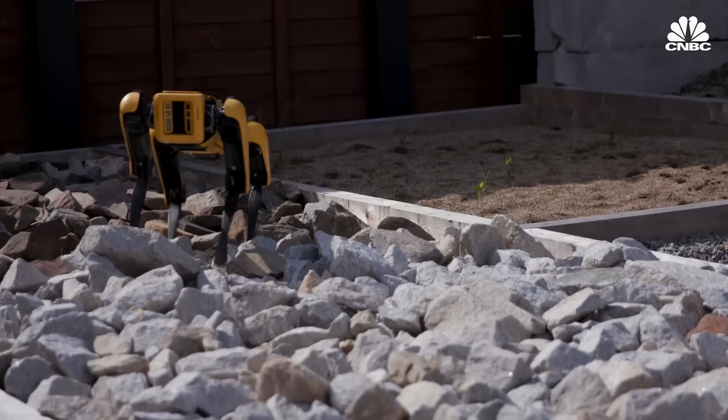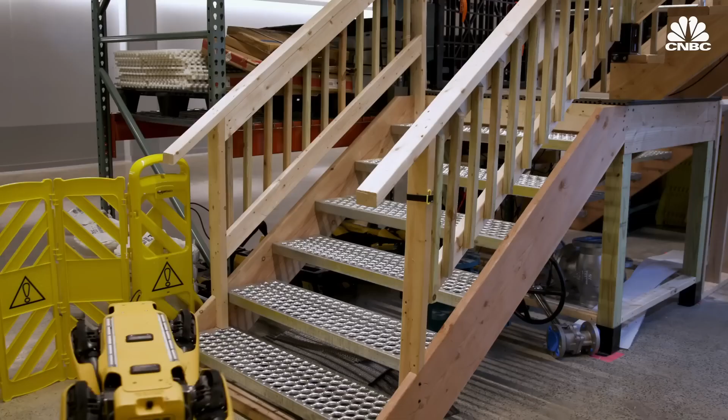Boston Dynamics' biggest challenge to commercialization today is just cost, pure and simple. The hardware itself is the other piece. The hardware itself for something like a Spot is today probably in the $75,000 ballpark. They've got a great robot, hugely technically capable right now, but that's far too expensive to really sell at huge scale today, because people's alternative is a robot that's not nearly as capable, but 1/5 the cost. And as long as it's capable enough, they're always going to go with that alternative.

Boston Dynamics hopes that's something else Hyundai can help with. Hyundai is really going to be a great partner for this stage of commercialization because they bring expertise in manufacturing and obviously a worldwide footprint in sales and service. And those things are going to help us get our robots out into a broader audience.

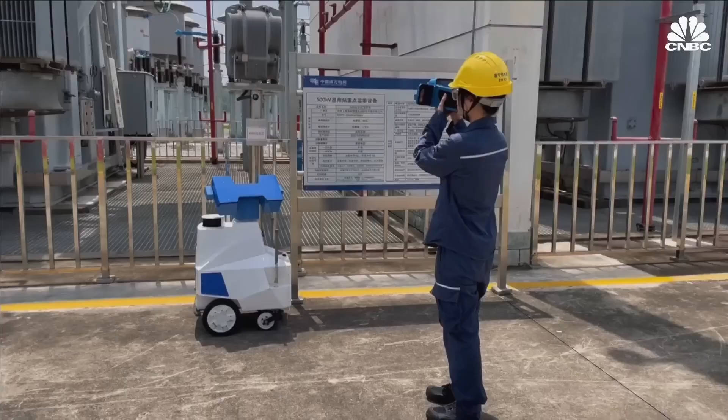In the inspection space, Spot will have to contend with wheeled inspection robots and flying inspection robots or drones. A number of companies, including Swiss-based ANYbotics and China-based Unitree Robotics, for example, are also making four-legged dog-like robots, though the latter seems to be marketed more as a human companion rather than an industry tool.

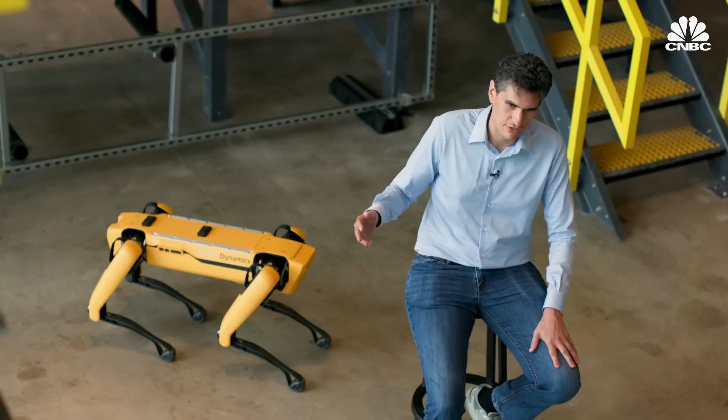We do enjoy a pretty good lead in terms of the robots having reliable behavior in complex environments. Our robots have dramatically better integration between their vision systems and their balance systems. And we also do a lot of the higher level functions that you don't see our competitors doing, like complex mission planning and actually completing a lot of these end-use applications that produce value. Spot's really the only robot in the world that can deal with the complexity of the terrain that people can.

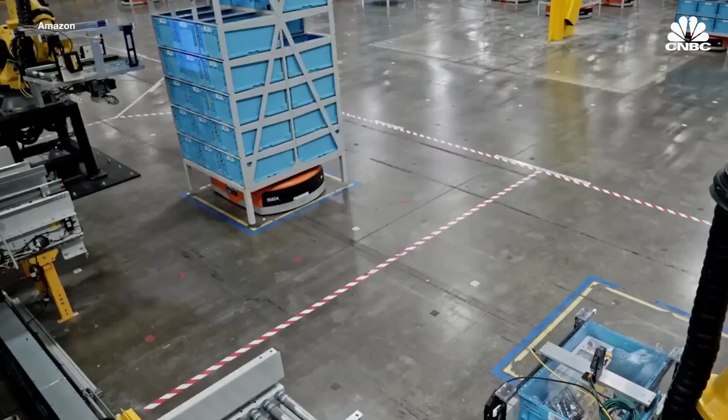Boston Dynamics faces just as much competition in the warehouse robot market, which includes companies like Six River Systems, Fetch Robotics, GreyOrange, and Geek Plus. And then, of course, there's Amazon. The interesting part with Amazon when it comes to logistics business is that they tend to develop solutions just for themselves. Amazon doesn't really supply the technology to external parties. But then again, there definitely can be a competitor because at some point, Amazon may feel like they are ready to now serve the wider market, and then they can now roll out their solution.

In the end, some experts believe the market could be regionally segmented, with Western customers choosing Western robot manufacturers due to security concerns. When you deploy a robotic solution into the field, it's also about collecting data. The current market perception is that if you were to go with the Western suppliers, in this case Boston Dynamics, there is a lot more respect towards how the data is being used.

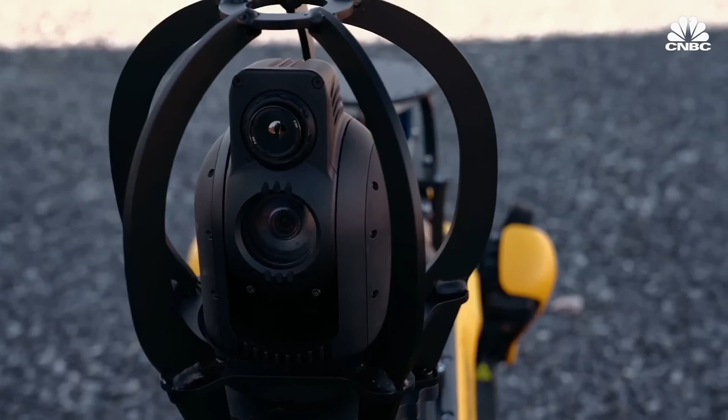Boston Dynamics says it's off to a good start. So I'm sure developing these products is very time consuming and too costly. How are you covering the cost right now?

Really through the investment of our owners, such as SoftBank and Hyundai. They're really covering the cost. Now we do have significant revenue at this point, which is also helping. We're generating revenue currently from the sales of our robots, primarily Spot. We have a little bit of time before we're profitable, but we're on a great trajectory so far.

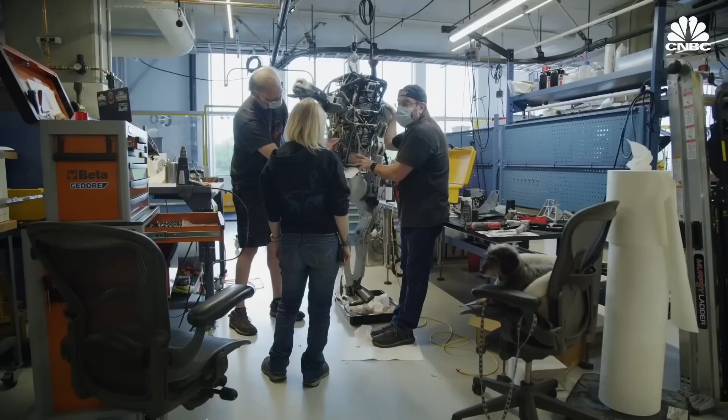As for its R&D roots, Boston Dynamics says it's not leaving those behind. It's critical that we maintain leading-edge R&D work within the company as we commercialize. But we've only covered a fraction of what we need to do with robotics. There's additional work in vision and manipulation that we want next-generation robots to have that we currently can't do. So it's important to keep pushing that forefront.

Playter says the company is also looking at other industries, including construction, manufacturing, and entertainment. As for Atlas, it will likely remain in the lab.

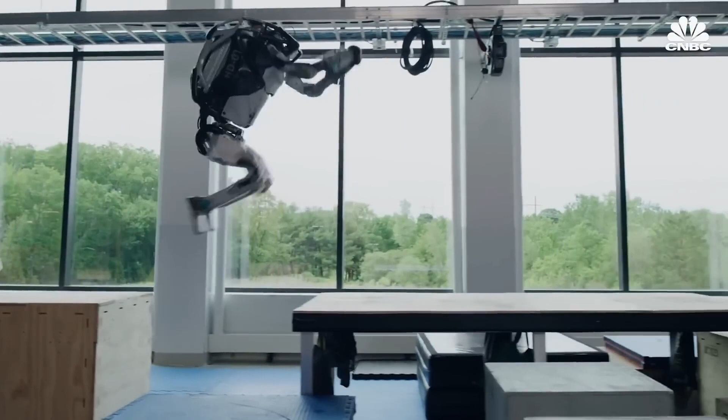Could we see Atlas doing parkour with us in our backyards someday? I do think robots will ultimately have relationships with their owners that could be rewarding and interesting. I don't see Atlas as being that product. I hope in the long run, robots aren't the exception. Instead, they become the rule and that we're all comfortable around them and they delight us and enhance our productivity and safety.